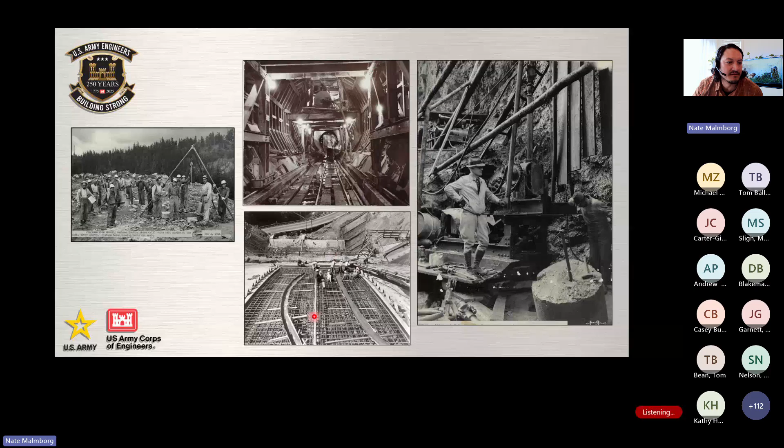But there in the middle, you can see the 23-foot tunnel which runs through the dam and the construction of the spillway there. Pretty fascinating.

I am going to turn off my camera. There we go.

Bull trout, on the other hand, they have stayed pretty consistent in their numbers. Their trend remains fairly level. Definitely not a large population here on the White River, but they're definitely here.

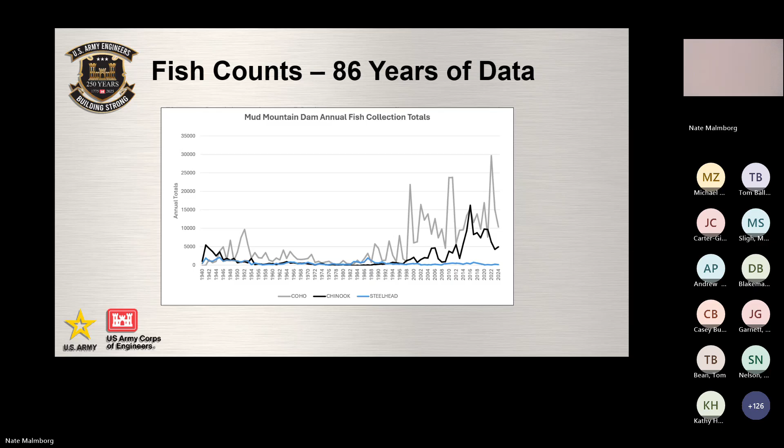Okay, so a little bit more history. Back in 1910, Puget Sound Energy, they constructed a barrier dam and a fish ladder in Buckley. It's a town just downstream of Mud Mountain Dam. They built this barrier so that they could divert water from the White River to fill Lake Tapps, and that water would be used to generate power at a powerhouse, which was decommissioned back in 2004.

Then what happened in 1941 is the existing fish ladder that was there was converted to a fish trap, a trap and haul facility, which allowed for fish passage past the barrier dam and Mud Mountain Dam. And yeah, that was a trap and haul operation. Interestingly, the Buckley fish trap was one of the first of its kind. I guess that's kind of why they named that type of trap the Buckley style trap.

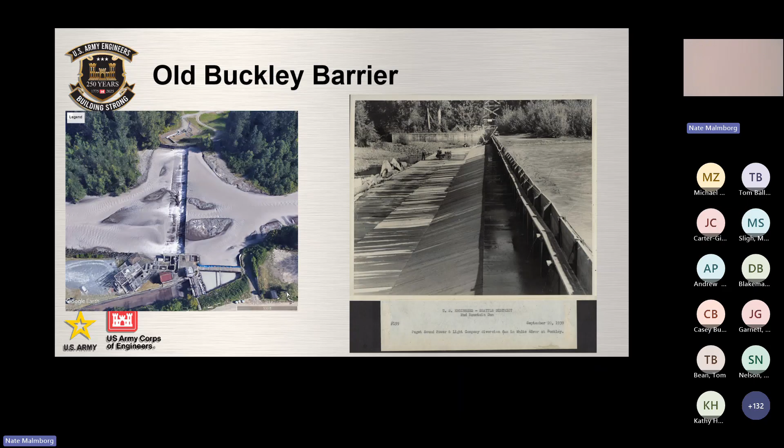So this is kind of what happened. If you're not familiar with the area, pink salmon haven't always been here in a lot of our Puget Sound rivers. In 2003 is when we first saw pink salmon in the White River, and it did become pretty obvious that our trap and haul system at the time was pretty much being overwhelmed by the huge masses of fish.

And yeah, unfortunately, the numbers of pink salmon returning resulted in a delay in transporting our Chinook, steelhead and bull trout. And that was even after purchasing more trucks, bumping up crews to 24-hour hauling operations. They just couldn't keep up.

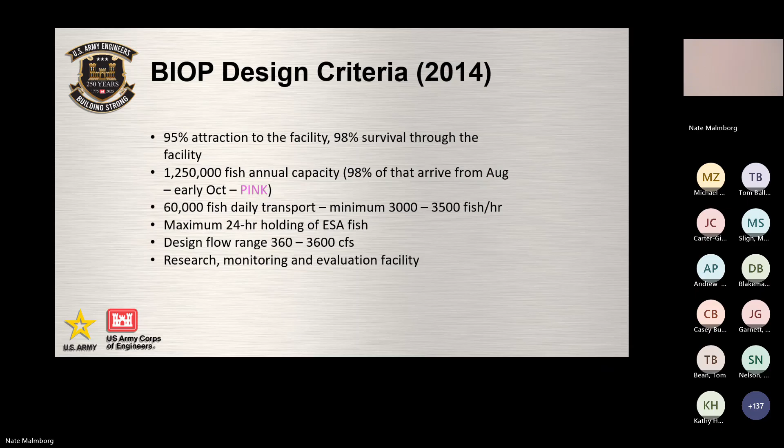That leads into the fishway here. And then we have a fish ladder with 10 pools. And those pools are delineated by Ice Harbor style weirs, which I'm really a fan of because it allows for fish to either pass above or through the weir, depending on species preference. They're pretty great. Also in the ladder, we do have 3 PIT antenna arrays.

So after the ladder, it leads into 2 pre-sort pools. Each pre-sort pool has its own crowder, and they gently guide the fish up to 2 Archimedes screw lifts. These things are massive. They're 55 feet long. Yeah, it's really pretty incredible. I do have some footage I'll share here shortly.

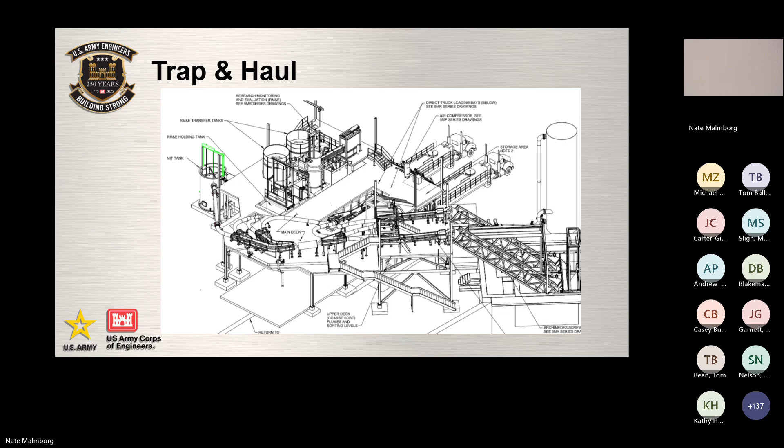But yeah, that being said, our first fish was passed in December of 2020, but regular operation of the facility didn't start until July of 2021. And just kind of due to how complex our operations are and how many moving parts there are in the facility, I figured that sharing a couple of videos might be really helpful. I guess it's kind of the next best thing to actually being there in person.

So hopefully this will work. I will try this out. Probably got to get off this pointer. Of course.

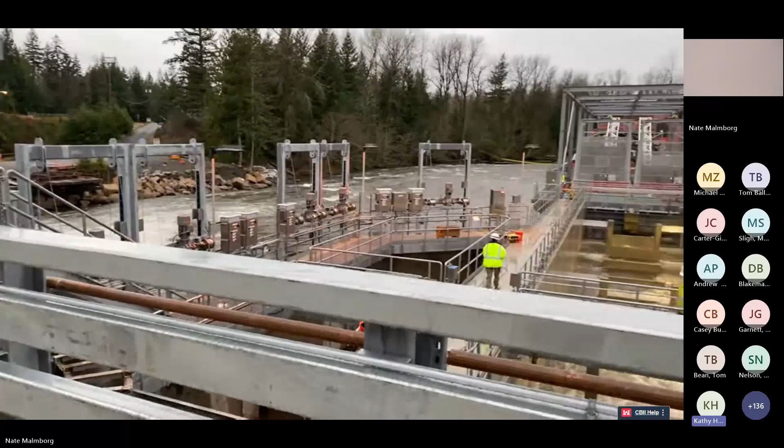Nate, while we're watching this, there was a quick question that came in that said, where on the White River is the facility located? Can you give a verbal description of that while we're watching the video? Sure thing. Yeah. So it is about 5 miles downstream of Mud Mountain Dam in a town called Buckley. Well, Buckley is the other side of the river, so the new fish passage facility is actually in Enumclaw, Washington. It is in King County, same county as Seattle.

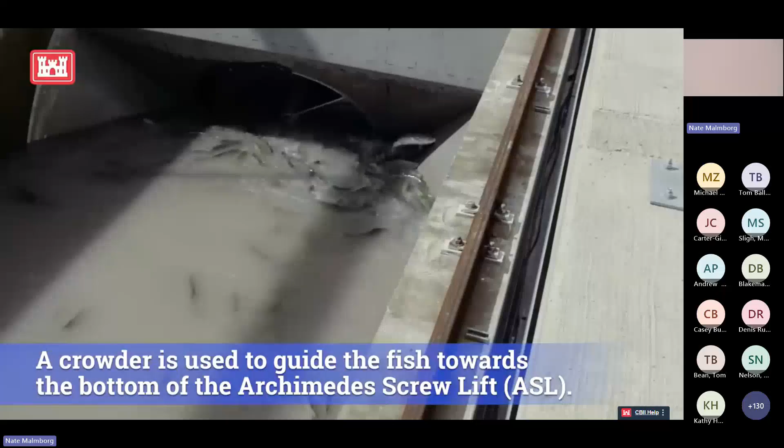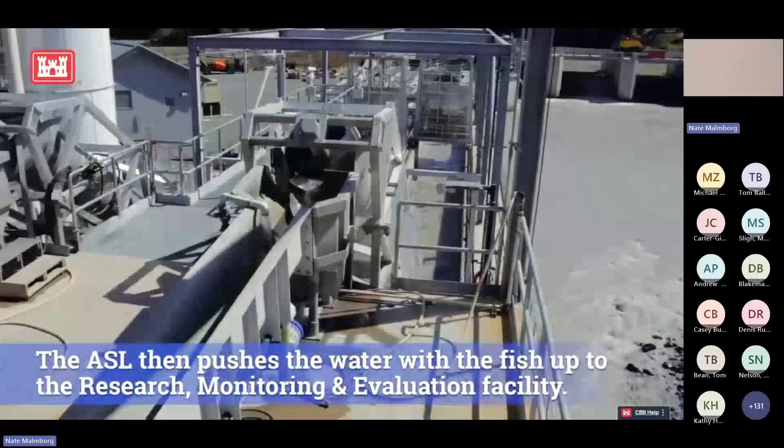So right here, you can see pink salmon. Unlike a lot of the other species, this species tends to volitionally enter the ASL. They'll just screw up there, no crowding necessary. But we do still have to crowd every day just to urge other species to make it up and through the ASL so we don't end up with just all pink salmon.

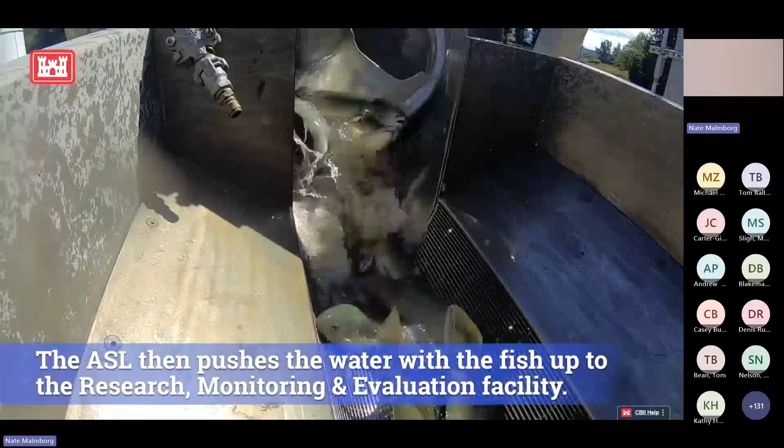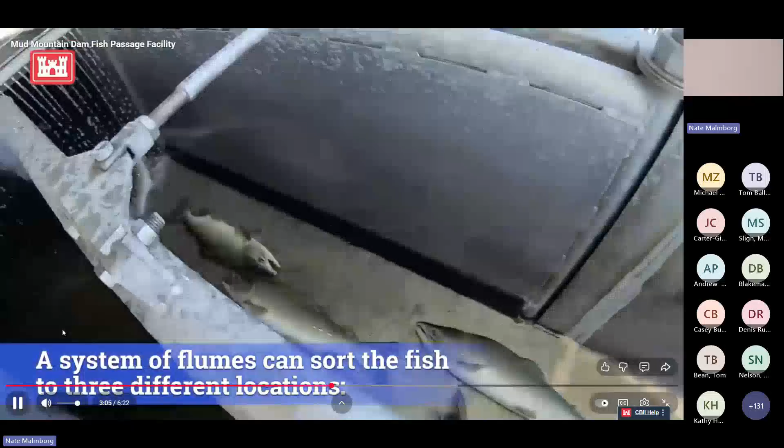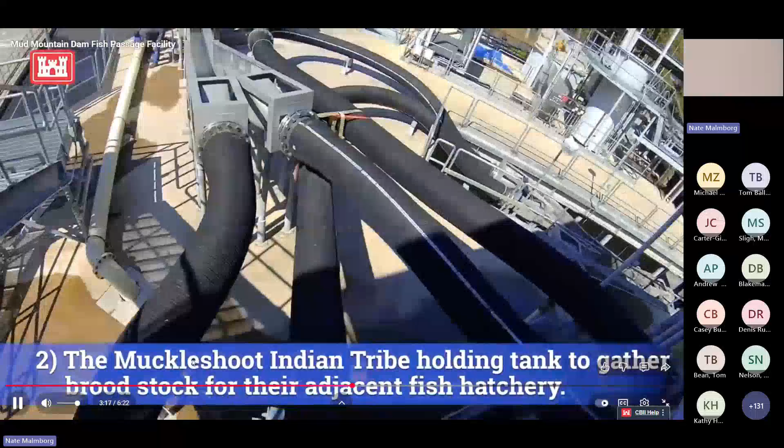But yeah, just looking at this video too is making me think, gosh, we really have done quite a bit of work to improve the facility. I know Casey's gonna share some of this here when he's up, but yeah, a lot of this looks quite different. The drains there at the top of the ASL we found were tearing fins and causing some minor descaling on some fish. So Casey and crew ended up patching up that drain at the top of the ASL. So it's nice and smooth now.

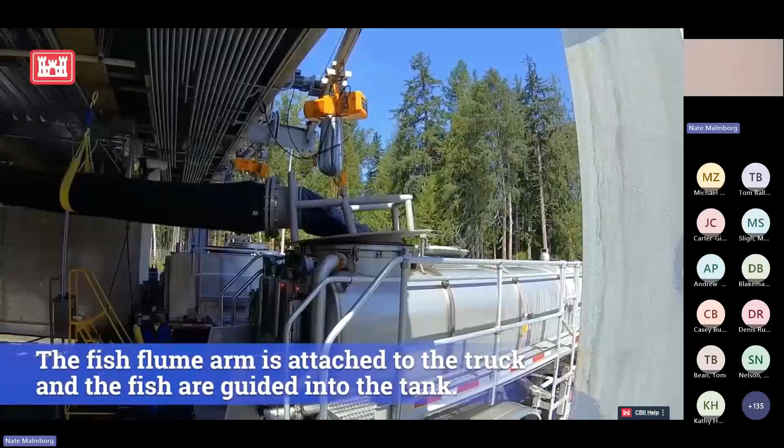Yeah, designed to move 60,000 fish a day. And just this last pink run this year, crew came very close. I think this video says that our record day was 53,000 fish. But this year, they broke that record with 56,000 fish. And yeah, that is a lot of fish, a lot of trucks.

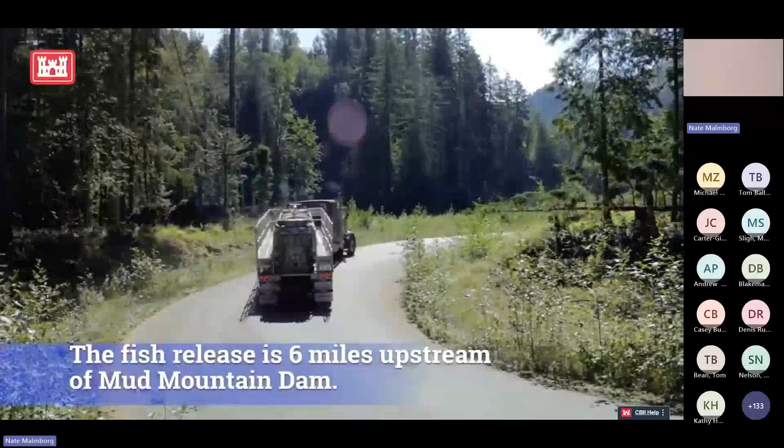And while all of these trucking operations are happening, we have everybody with their own responsibilities. Somebody on the hoist to lower the flume onto the top of the truck. They'll also be monitoring oxygen levels to make sure that oxygen's good, temperatures are all right. They're monitoring to make sure, if it's slow fishing, that the truck isn't there too long. If they hit a certain time, then they'll send the truck on, even if it's not full.

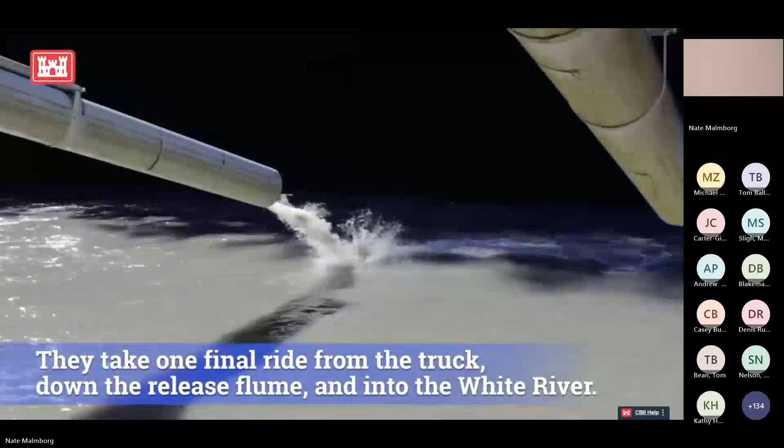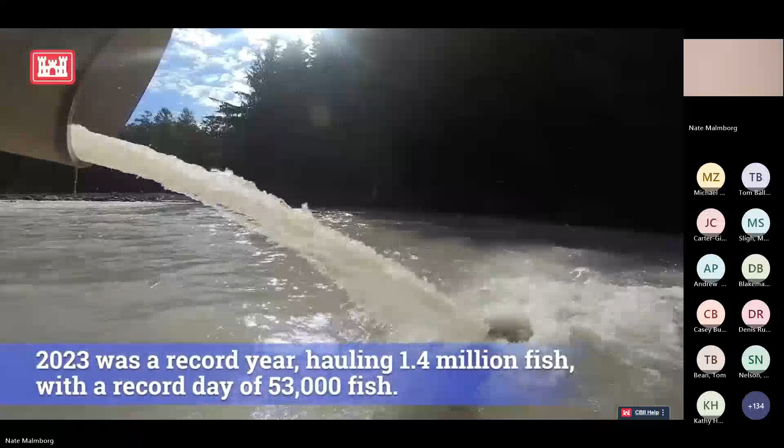And yes, even though we did have the record day haul this year, we didn't quite meet the 1.4 million. We were just shy at just over 900,000. That's still a lot of fish.

This year they were seeing pink salmon all the way up Greenwater and beyond. They are highly motivated to get up there to spawn.

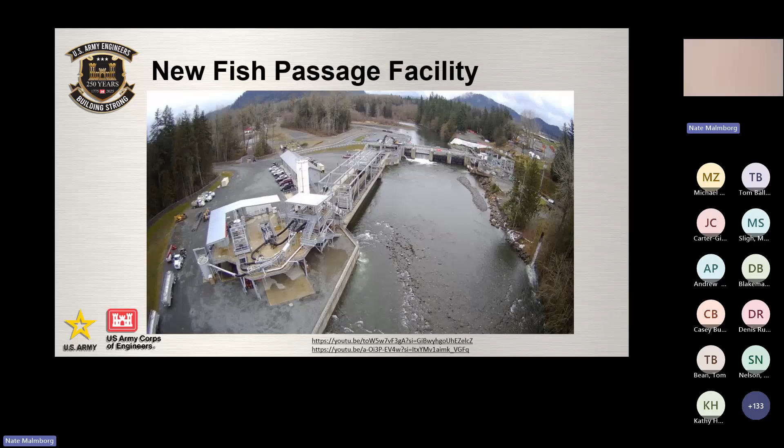So now we have our NMFS criteria for needing to track 95% of the ESA fish that get to the facility, right?

It has been kind of a learning curve for the past few years. We've been trying to figure out how to best get the fish to enter the facility, so they can get through as quickly as possible, safely.

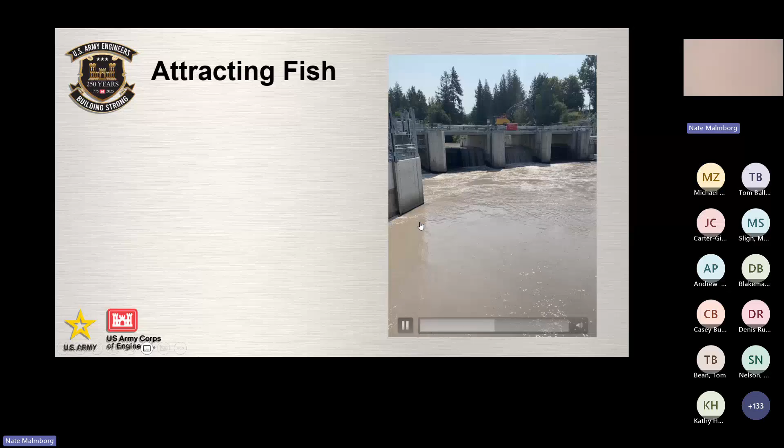In this video, you can kind of see the typical pink salmon behavior. They're stacking up along the wall here, getting ready to move into the entrance gates. Across the river, it'll zoom in here, you'll see a school of pink salmon kind of milling around. They're not entering the facility.

We already saw the pre-sort pools in that video, but just a quick note here - you can see the V-traps. I was mentioning retention - those attraction studies that PNNL conducted did show fish kind of moving in and out of the pre-sort pools. So since then, the V-traps have been taken out as of now, and we'll likely see what those are now replaced with.

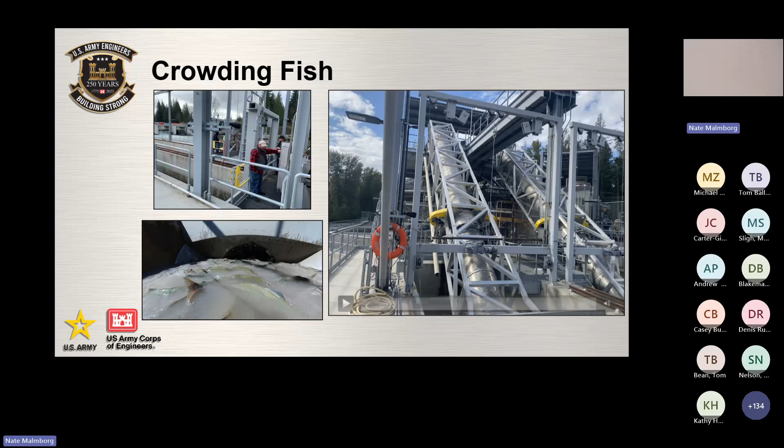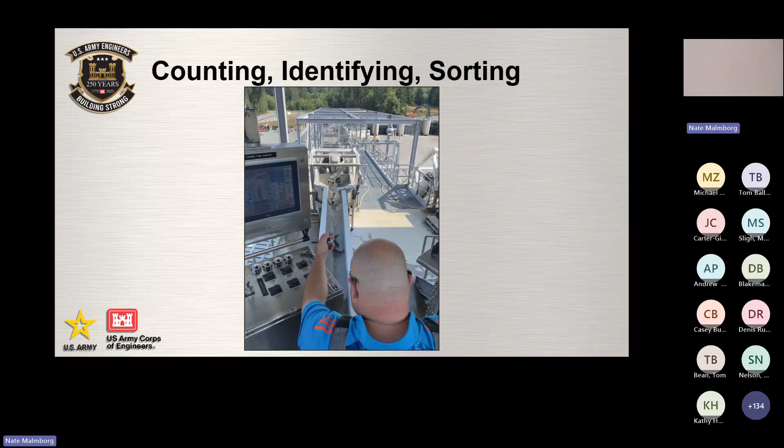Counting, identifying, and sorting - this is at the top of the ASL here. Counting is not an easy task. When you have several species of fish moving through, you're trying to direct fish to either the trucks or the research holding tank. It can get pretty tricky.

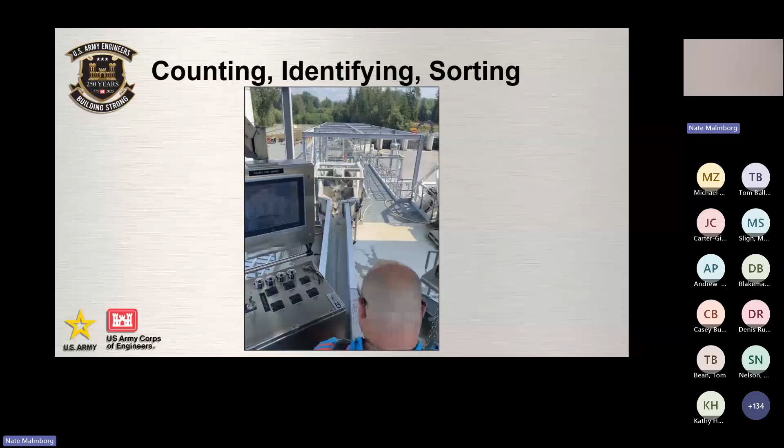This gentleman here, Evan, in this video, he probably counted and identified around 500,000 fish in 2023. I can even imagine 20 plus fish each rotation of the ASL, for 12-hour days, 6 day weeks. It's pretty daunting to think about, actually.

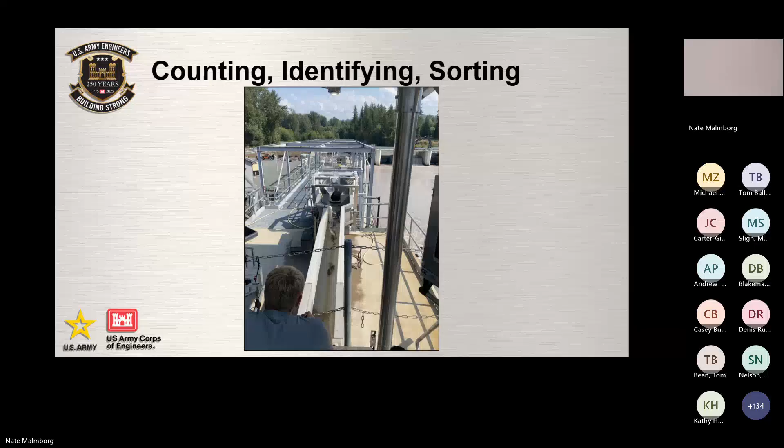And there's Paul, the gentleman who counted the other 500,000.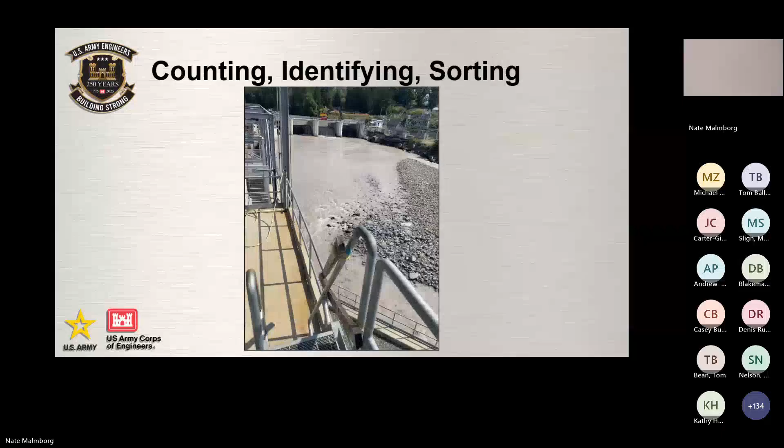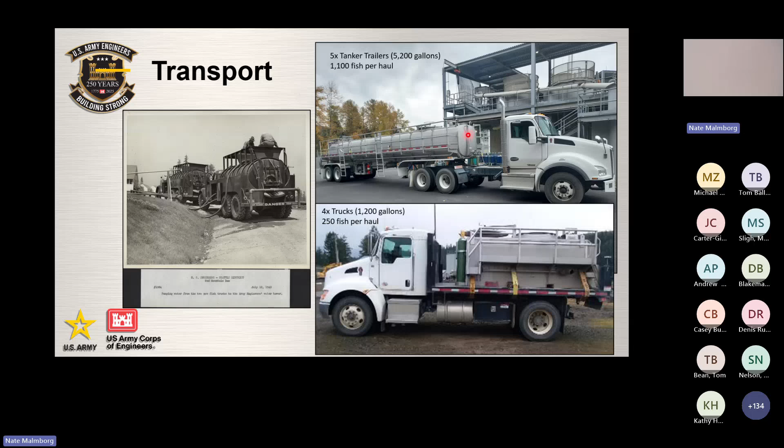I really do love this photo here. It's the original fish trucks from the 1940s. It kind of goes to show how far we've come, but still using the very same methodologies for moving fish. Interesting. Currently we have 5 tanker trailers, they're 5,200 gallons - that's a 5,000 gallon tank with a 200 gallon flush. And we have 4 small trucks, each 1,200 gallons.

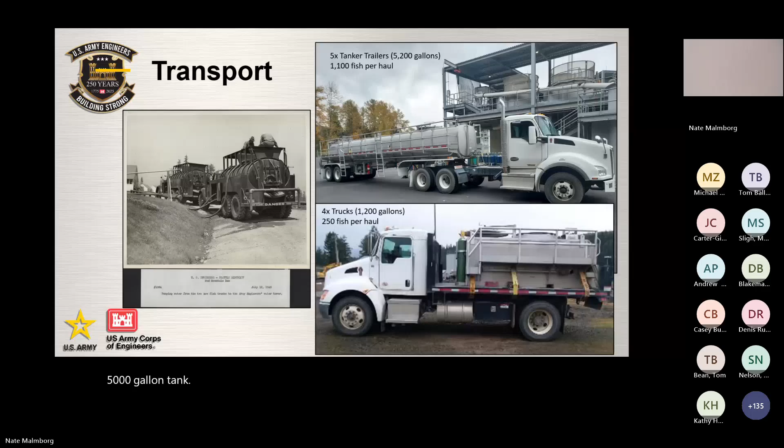And there's our upstream release. We saw that in the video. I guess I can play this one, show a little bit more detail on the release process.

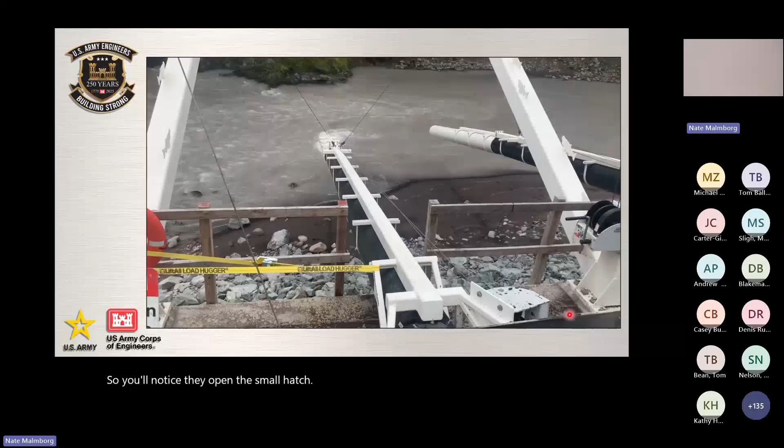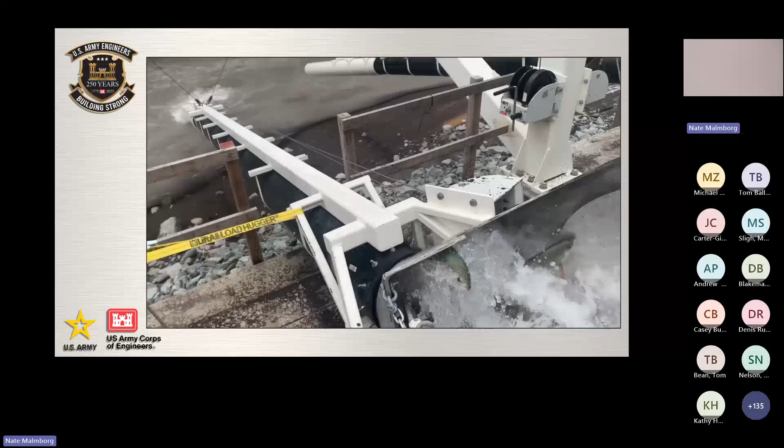You'll notice they open the small hatch at the end of the truck here. They do this to drain some of the water before fully opening it to release the fish. That'd help reduce velocities so you don't end up with fish all over the deck. Having to wait so long to drain half the water, that used to be kind of like an operational burden or a pinch point.

Thankfully, we don't have to do that anymore because our new tankers are retrofitted with baffles that were installed, and those actually greatly reduce those release velocities and wait times too for the trucks, so they can head right back to the facility for the next load.

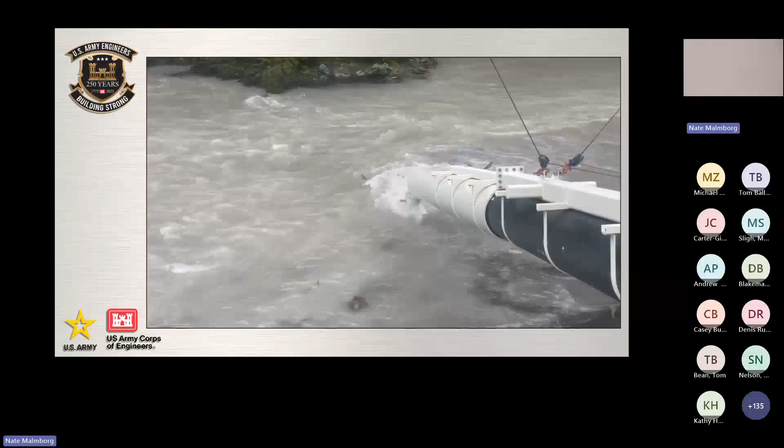What else? Here's kind of a neat video. Yeah, nothing like a slow-mo video to add some dramatic effect.

One of my fun tasks is to monitor the release site for fish safety. I'll wait out there during low flows, whenever the river is 500 CFS or below, and make sure the site depth is sufficient for fish. We put all this effort into attracting fish, safely trapping them, and hauling them upstream—it'd be all for nothing if we released those fish into water only a foot deep. Thankfully it hasn't gotten that shallow yet, but if depths aren't sufficient, I'll let Casey know. We found that running a truck full of water through the flume works great—it's more than sufficient to clear the way for the next truck for fish to be safely released.

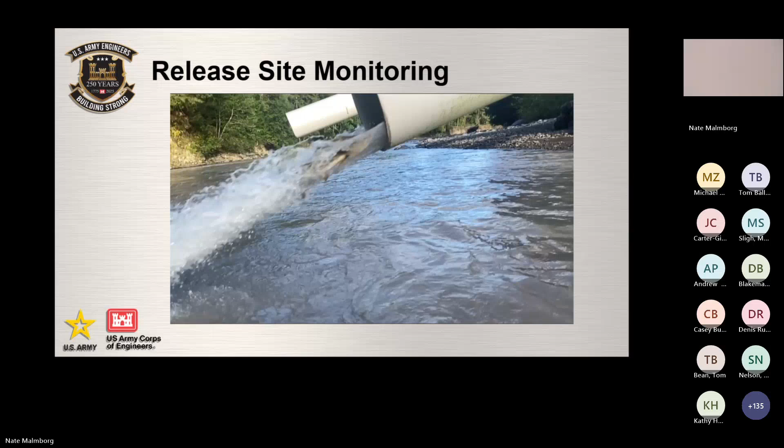Since the FPF came online and became operational, we've greatly reduced mortalities and injuries in the facility. We report our mortalities to NOAA Fisheries and track all of these things. We track injuries—significant injuries would count against our take per our biological opinion. We monitor injuries and work closely with our tribal partners as they're sampling fish, and we report all of that to NOAA Fisheries.

Fish attraction efficiency—it's getting there. I'm really hopeful that what the crew implemented this year will show that we are meeting or exceeding our requirement.

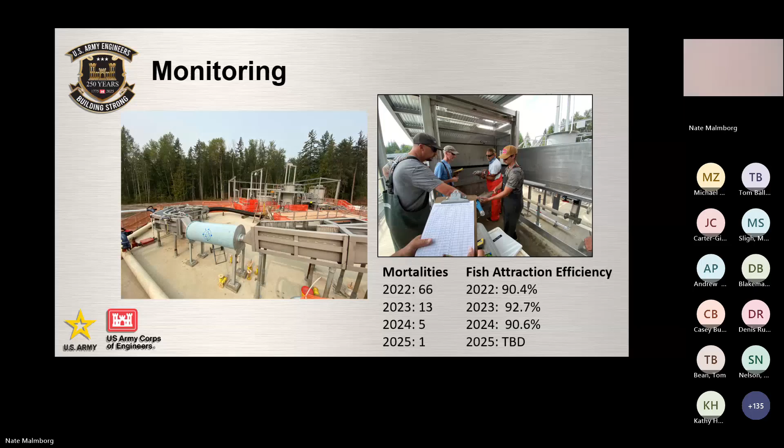On a daily basis, we try to the best of our ability to track environmental factors to see if there are any correlations with fish movement into the facility. Just knowing when fish move can help prepare for staffing and potential weekend work. We track everything from water temperature, air temperature, head differential, ENT gate openings, barometric pressure, dissolved oxygen—you name it, we're tracking it.

As for operational challenges, one of the most challenging things at the FPF is dealing with all the highly erosive glacial sediment that blasts down the river. This sediment tends to get into every nook and cranny of the facility—it wears all the pumps, clogs the intake screens, and erodes concrete. It's pretty eye-opening to see the erosion already happening after only a few years of operation.

Casey has come up with some pretty ingenious ways to deal with sediment in the facility, and I'm hopeful he'll cover some of that in a bit, if I don't take up all the time. Holy smokes, I better move it.

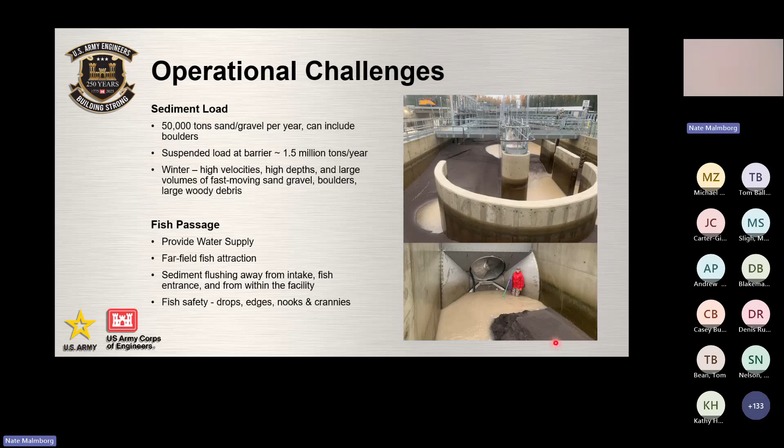You can see this sediment in the pre-sort pool. Currently there's probably about three times more sediment than this amount in the pre-sort pools, and that doesn't make for an easy crowding—if you want a clean, full crowd of the pool, it's not easy to do with lumps of giant sediment in it.

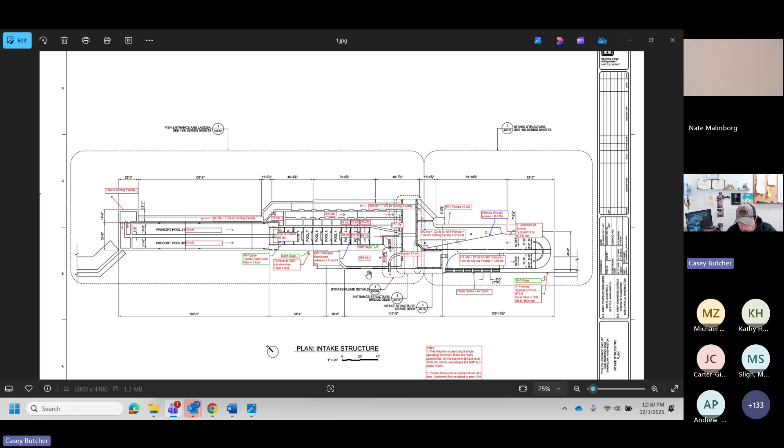So that's the general makeup of how water flows through the facility. I'm going to go over some of the improvements we've made.

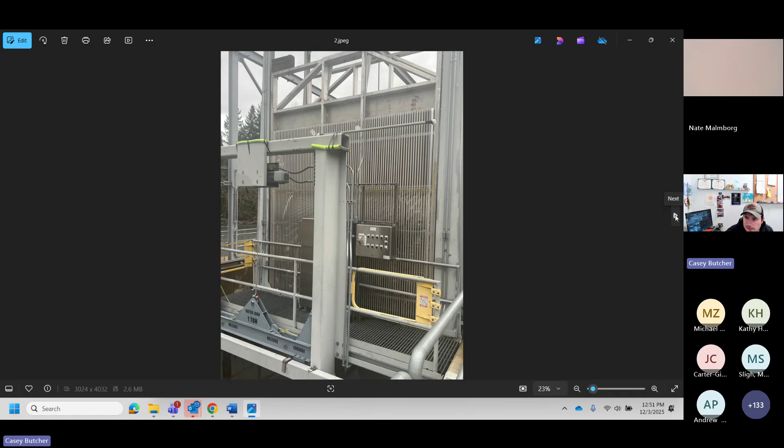This is the back side of the crowder. Early on when we first started, we had a large fish mortality event. Fish were jumping into the ASLs and asphyxiating themselves overnight. So we ended up putting this bar stock on the back side of the crowder, and that's what holds them from getting to the ASLs overnight from day-to-day operations.

This is one of the second iterations. It was air as well, but we had to increase the size of the line to effectively mobilize the amount of sediment we get in each one of those pre-sort pools.

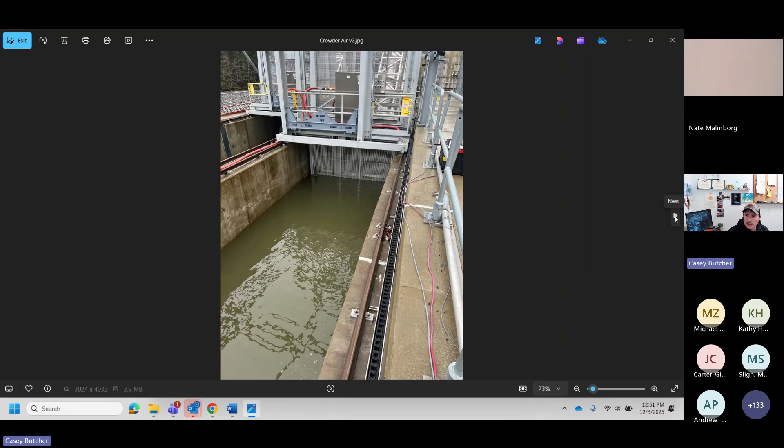We did try a sediment mixer. They use these a lot in wastewater applications. It worked really well, but ended up cavitating quite a lot, and we were wearing them out within a couple weeks.

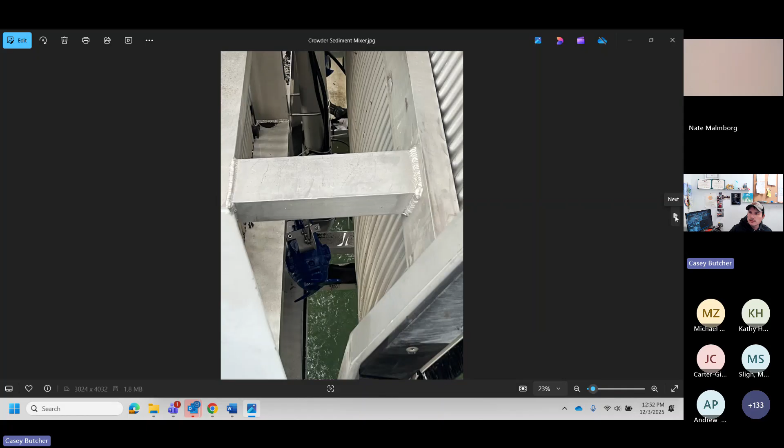This is the very first version of the finger weir. You can see it's the typical design where fish would swim over these veins here.

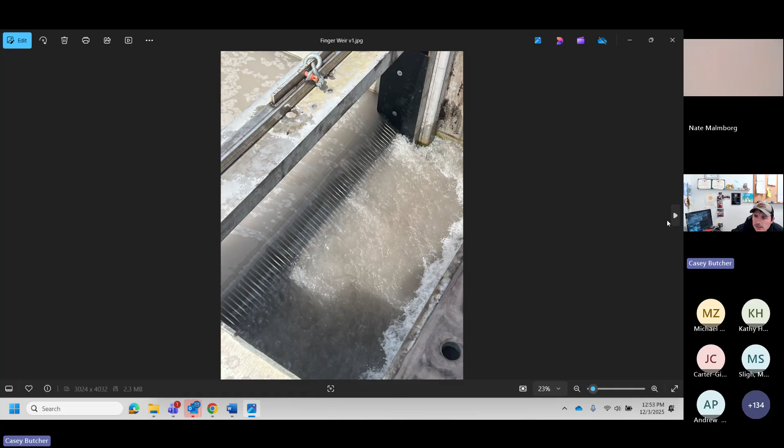We did add, on our fish ladder, some of the weirs in that ice harbor design were at the wrong elevations and tilted, so we had to cut off all the tops and added UHMW weir tops to those, which not only help with abrasion for the fish but seem to control flow more uniformly across those weir tops.

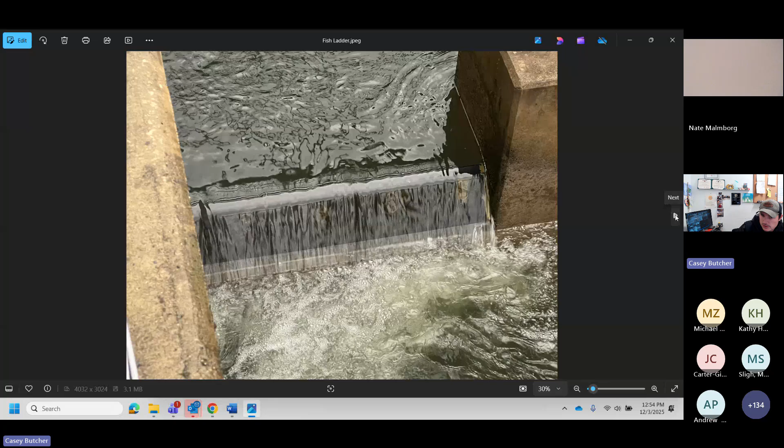We tried this fish retention device this past year. It's a pass-through design using crab pot fingers. Worked really, really well for steelhead, but not very many other species liked it that much. So we will be incorporating a dual design next year of a finger weir and this pass-through design on the bottom of it.

We did have to add brushes around the entire fish crowder length due to gap tolerances around the edges here, to prevent fish injuries. Same thing with this rubber around the ASL shroud, just to prevent this ASL, as it turns, from creating a scraping hazard to fish.

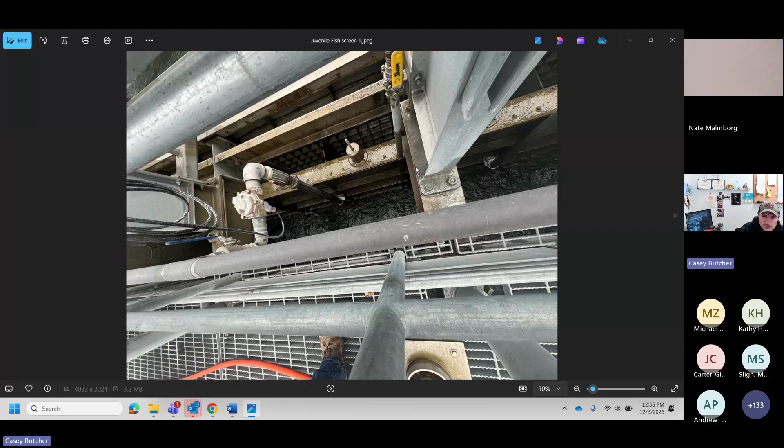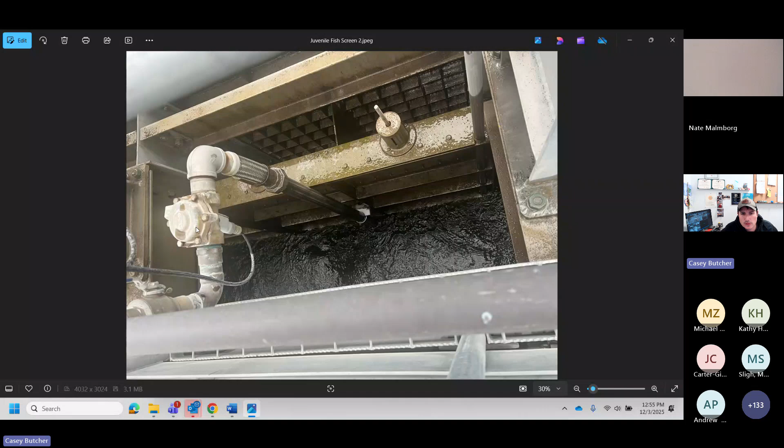Juvenile fish screen - since we get a lot of sediment and organics in the water, we had to develop an air system to keep that juvenile fish screen clean so we could get proper flow through the entire facility the whole time. It operates off a 2-inch air pipe controlled on a solenoid via our PLC system. That's kind of what it looks like when it goes off.

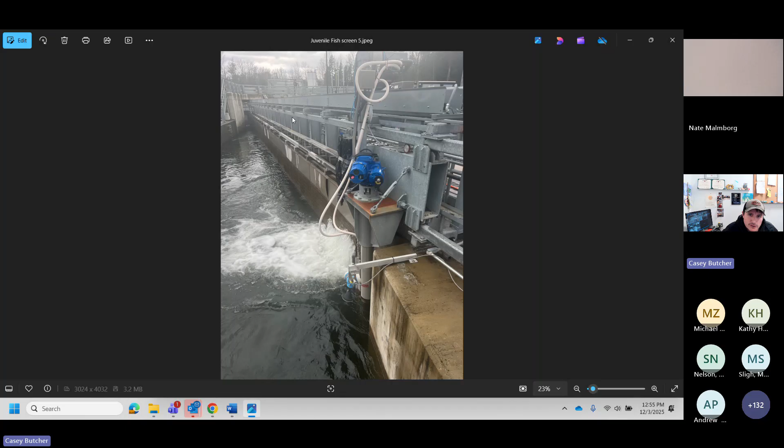It cleans each individual panel all the way down this 84-foot long juvenile fish screen. See the reference for how long that is.

We added this pipe so that the Muckleshoot Indian Tribe could get their fish to their tank, which could be transported over to the hatchery right next door to our facility. This is their MIT holding tank, where they hold their brood stock.

This is where we're sampling Chinook. We added this UHMW piece here to help fish slide down that brail section, because it was perforated steel and fish would get stuck on the length of it.

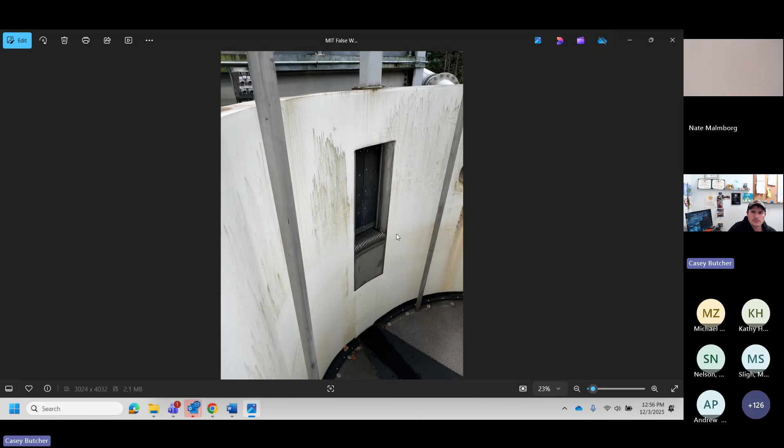Here's a false weir to attract them into the opening to get into their truck. We added these rubber flaps to prevent them from going in when they're not supposed to. You can see the pass-through on the left and one of the finger weirs on the right-hand side.

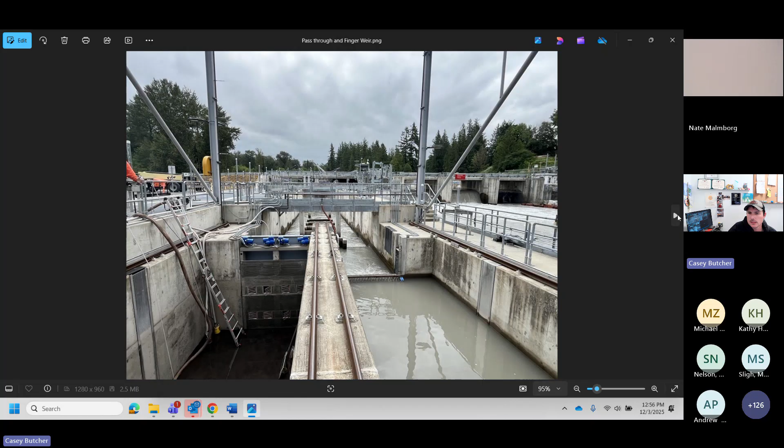We had to add this jumping deterrent for steelhead - it was just right here at the concrete. We ended up with 2 steelhead mortalities in this area when we first commissioned the facility.

This is the amount of sediment that used to get behind the juvenile fish screen. There are some mud valves here that we now operate on a regular basis. This is in front of the juvenile fish screen sediment.

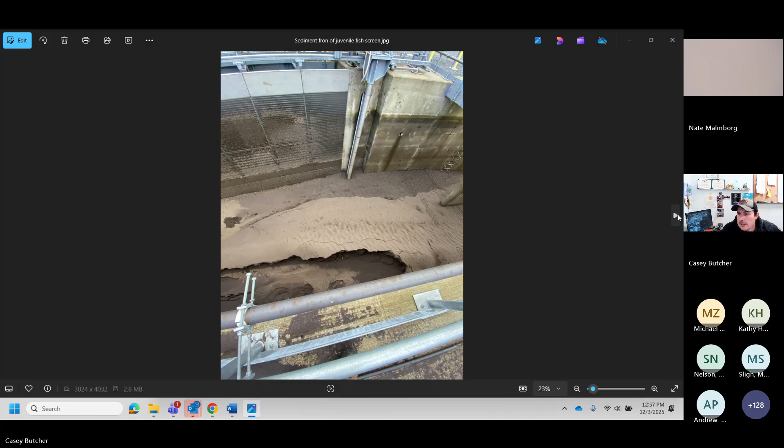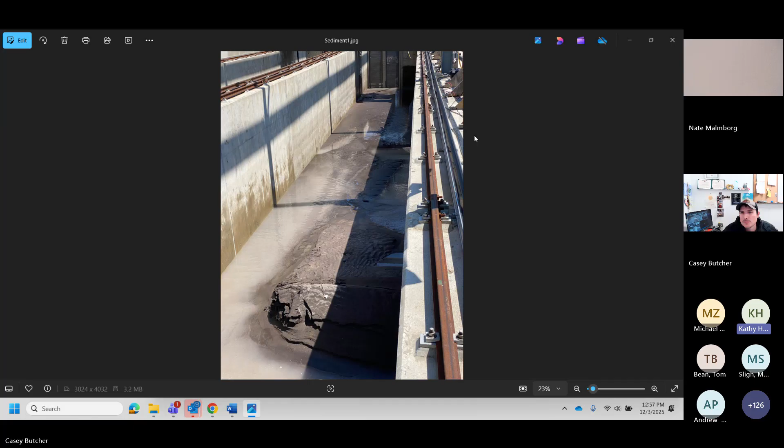They've been to the Minto facility in Oregon and it was estimated at 35 million. So what do you guys have? It was originally put out to bid for about 133 million. That included all 3 phases with Cascade Water Alliance improvements. We got some subsequent money, so we're close to probably 180 to 200 million right now.

Trying to find ones that Kevin hasn't answered - is there an air burst on a timer or manually operated? Also, what about the pressure? The airburst system on the juvenile fish screen is automatically controlled via head differential between the front side and back side of the screen, or every 20 minutes. The pressure on that is around 50 to 75 psi, depending on if it's fall or regular season.